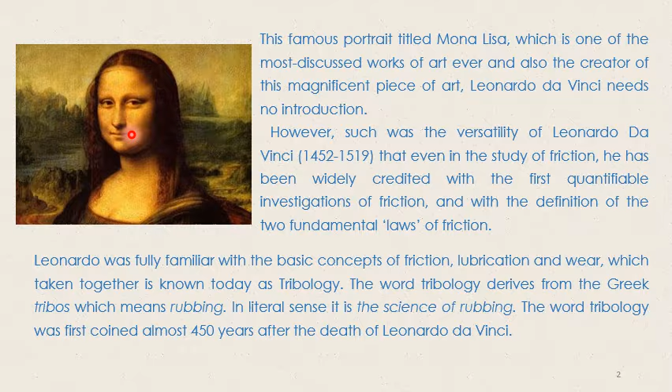Unfortunately, Leonardo never published his findings on friction, and obviously he did not get any credit for his wonderful works. However, he maintained a notebook where he had noted down all his findings with sketches and with meticulous writing. He studied the subject of friction for simple blocks, screw threads, wheels, and many more, which are evident looking at his notebook.

Now, this is one of the sketches which I have got from this particular reference and reproduced over here to show you his meticulousness in drawing the sketch for a friction apparatus. Leonardo's basic laws of friction stated in 1493 were later articulated by Amontons and Coulomb. You must have heard the name of Coulomb because you have done Coulomb's laws of friction in your school days.

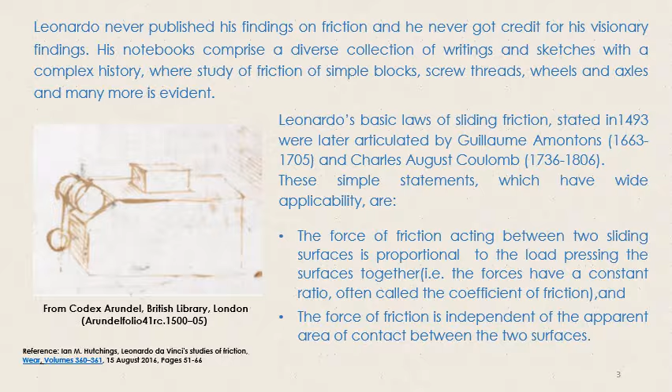Now, whenever one contacting surface has a tendency to slide over another surface, the tangential force generated between the contacting surfaces is known as friction force. And it always opposes the cause which creates a tendency to slide. This is the basic law of friction which you should keep in mind, because it is important while drawing the free body diagram for solving problems, where you should draw the friction forces in such a manner that it always satisfies this simple law of physics. However, there are also certain conditions to be satisfied that we will talk about at a later stage.

In machines and processes such as bearings, power screws, gears, flow of fluid through pipes, etc., we always want to reduce the friction because that will always give you a better system efficiency.

In this context, lubrication is also used to reduce friction between the mating parts of the machines, and the reason is as I have just stated. Whereas in certain situations like brakes, belt drives, car tires, even in shoes used for normal walking, we look for maximization of the friction. This particular part also we will touch upon as an application of friction at a later stage.

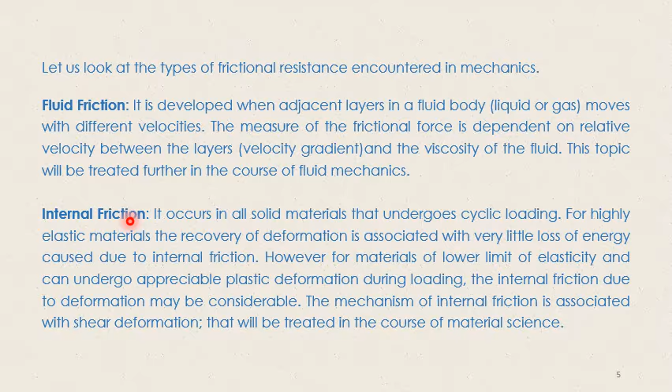Now, let us focus on dry friction. I put this one last because this is the most common type of frictional resistance, and this is the topic we will study in the course of basic mechanics. So we are concentrating now on our subject matter, that is the dry friction.

So as per the basic definition of friction, dry friction arises between two unlubricated solid surfaces in contact having a tendency to slide or sliding. Note the word unlubricated, because in this case there is no lubrication associated with the interface. It is simply a metal to metal contact, and it has got a tendency to slide or sliding.

Now look at this particular figure. It's a very simple figure, a block of mass m placed onto a ground, and a force P is being applied from left to right onto this block. Now what will happen? You very slowly increase the value of P. It is very difficult to do by hand, but anyway, if you try it out, you will find that at a very small force, the body remains as usual.

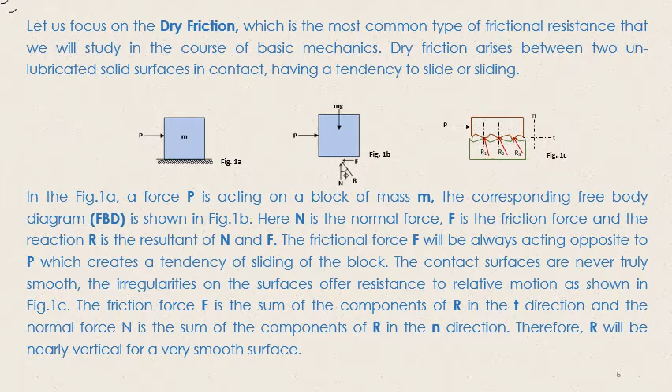Now let's look at the next slide. So I have again copied the earlier figure 1c over here. Now, what I have just told you: in the beginning, the irregularities are in close mesh and offer more resistance to relative motion, because at the very beginning this hump is lying over here, this hump is lying over here, and so on. But as the force P increases, the contact moves closer to the top of the hump. That means this will rise from this place to this place, and relative motion of the block is initiated when it comes up to the contact point.

So this explanation helps us understand why less force is required to maintain motion than is required to initiate the motion of the block. Once it starts, it becomes very smooth. Okay. But just to initiate motion, you require a certain amount of force, which is normally larger than the force required to keep it moving.

Now you can see the second statement of Leonardo da Vinci's laws, as given by Coulomb and Amontons: the friction force is independent of the projected area of contact. That is understood from this particular figure. See, the true area of contact is only the top of the asperities, which is much less than the total projected area. Suppose this is a constant width. Suppose this is the distance I am having, just roughly.

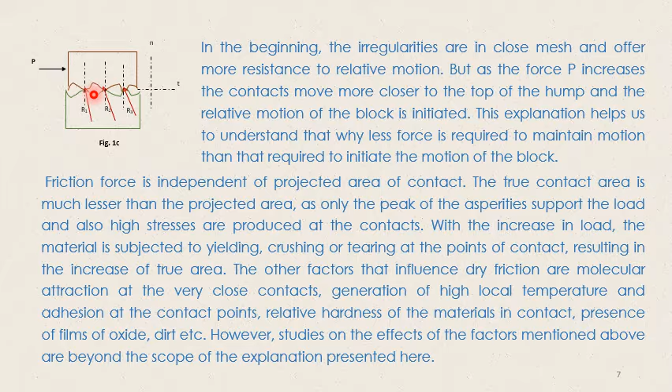So here we can see the standard curve, which you also know. The body was there at this particular point. There was no friction because there was no relative motion. Now you are increasing the value of P, and the friction force, which is of course opposing the direction of P, is increasing gradually. This particular zone OI is called the zone of static friction. And this friction value increases till it reaches I.

Once it reaches I, the motion of the body is just initiated. That particular point is called impending motion or impending slippage. We'll be considering impending motion, and in certain cases we also call the same phenomenon impending slippage. At this point only, at the point I, the magnitude of maximum friction is proportional to the normal reaction and written as F max equals mu s into N. N is the normal reaction, which I have defined earlier, where mu s is the coefficient of static friction.

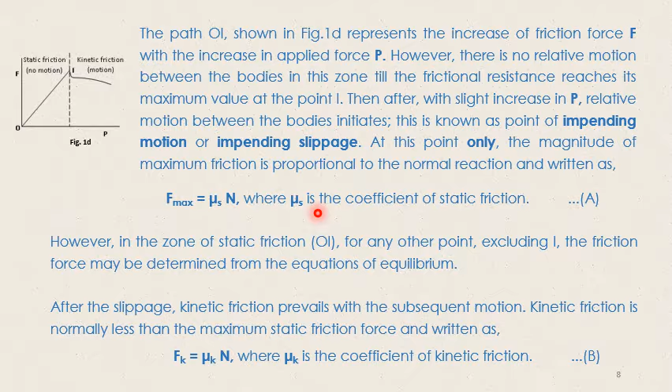So you understand that, just to have the maximum friction force, we always consider the body still in the static equilibrium state, but it is just at the verge of moving to the kinetic friction zone. Okay, so from this slide, what we should keep in mind is that F equals mu into N should be used only at the impending condition and nowhere else. This, again I am telling, is extremely important.

Once again, we refer to figure 1b, which is copied from the earlier slide. Now, what we can write in general is that mu equals F by N. And this F and N are represented in terms of components of R, that is the resultant, as R sine phi by R cos phi, and it gives the value as tan phi. And obviously it is at the impending condition.

Thus, just from the visual look of this angle phi, we can gather some idea about the surface roughness. If phi is very small, then we understand that asperities are not that high, so that will be a relatively smoother surface, and vice versa. So this consideration we take up to represent a visual look, as well as to define that mu also can be written as tan phi, where phi we call the friction angle.

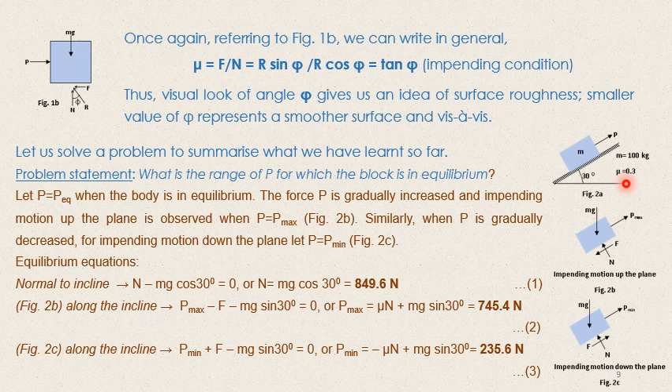So as we discussed in the earlier slide, just note that by considering impending motion, equations 2 and 3 could be solved by substituting F equals mu into N, which we get from the law of friction. The range of P for which the given body is in equilibrium is this much. That result we already calculated in the earlier slide. As far as the problem is concerned, we have the results with us.

But anyway, let us investigate once again. For any other value of P within the equilibrium zone, what happens? Within the equilibrium zone, we can only find out P, F, and N. Again, three unknowns come into the picture. So what we do is substitute various values of P so that correspondingly F and N can be determined. That has been done, and is shown in figure 2D in the form of a chart.

Now, because we are finding F, the force of friction, for the equilibrium condition, we can use either of equations 2 or 3. It doesn't matter. Why? Because in that case, we are keeping F purely as an unknown. So if it comes out with a positive sign, the direction of friction we have chosen is correct. If we see a minus sign, then the direction of friction force should be opposite to what we have drawn in our free body diagram.

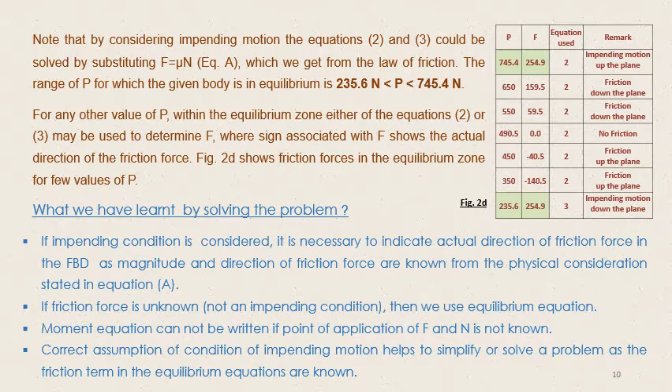Let us take another example problem which states: what is the minimum force P required to create motion of the blocks? This problem refers to figure 3a, where you can see there are two bodies. The first body, having the weight W1, has a dimension of 1 meter by 1 meter. The lower body has a weight W2 and it is placed on the ground. Now a load P is acting exactly at this point, that is, the top left corner.

So to analyze this particular problem, we can understand there are three possibilities. One possibility is that when force P is applied, the top block may topple, number one. Number two, the top block may slide over the lower block. And the last one, the two blocks, that is the top and the bottom block, may slide together over the ground. So let us examine each possibility.

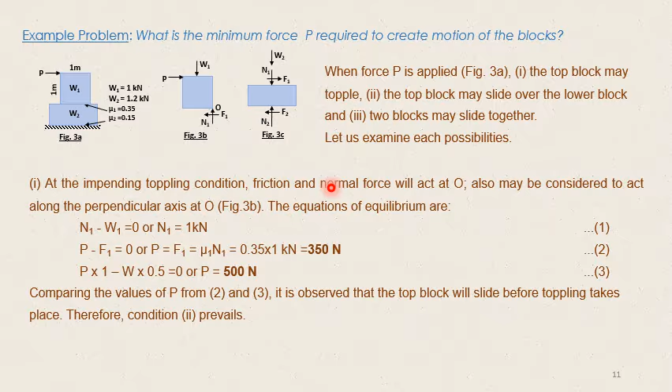So toppling is not considered. That means toppling is not a possibility. Therefore, the top block may slide over the lower block. So let us see the third condition in the next slide.

Now, next we consider the free body of the lower block, which is shown in figure 3c. In this particular free body diagram, we have unknown parameters F1, F2, N2. And we have got two equations: this is the fourth equation, and this is the fifth equation, which we can get from this free body diagram.

Now, we can look into the problem in two ways. One is that we consider F1 to be at impending condition, so F1 can be obtained from the equation of friction, that is F1 equals mu1 into N1. Therefore we can easily solve for two unknowns, namely N2 and F2.

The other way, let us look at the maximum capacity of F1, and then find F2 from the equilibrium equation, and then analyze the value of F2. Let us do that. Because both F1 and F2 cannot be at impending condition simultaneously, F1 is considered at impending condition, so F2 has to be determined from the equilibrium equation. So F2 minus F1 equals 0, or F2 equals 350 Newton.

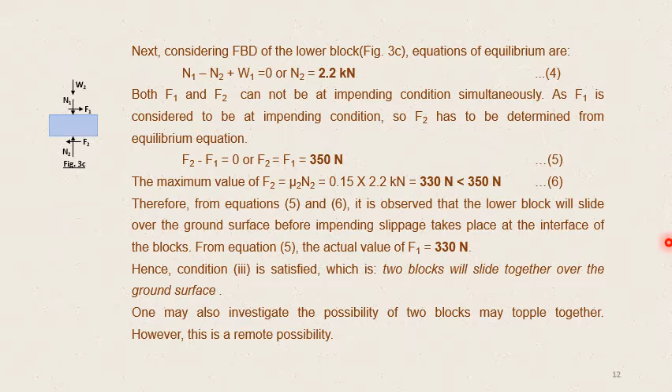Now we consider another situation, slipping and rolling friction. This is primarily applicable to the bodies which are, as I told you, a roller or a wheel sort of thing.

So in this particular case, you can see a roller which is acted upon by a load P acting along the handle, and this load P is transferred to the body of the roller as shown in this exaggerated figure. This black one is the shaft attached to this handle, and it passes through a socket placed at the center point of this roller, so that this shaft transfers the force P onto the roller body in this direction.

So what we see over here is that this P is decomposed into one horizontal force PH and one vertical force PV, and the roller is moving towards right, for which a frictional resistance between the shaft and the roller is put as an anticlockwise moment M0, and also a friction from the ground is acting at this particular point, which is just below the center point of the roller. There is a normal force also acting, and R is the resultant force acting at this point.

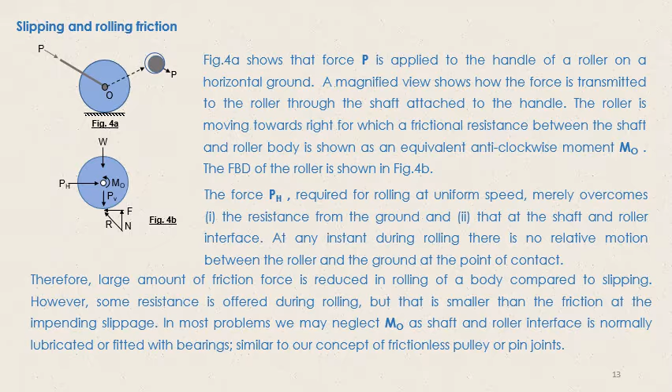In this slide, figure 4B from the earlier slide is shown again, and it is evident from figure B that when M0 equals 0, F and PH do not exist. That is shown in figure 4C. This is very interesting. The moment you remove M0, assume it is not there, then from the equilibrium equation we find that PH must be equal to F.

And if I take moment about this point, F multiplied by the radius equals 0. That means F cannot exist, and then PH cannot exist either. So W plus PV equals N becomes the only equation for this roller, with no other forces in the horizontal direction. This means no resistance to the roller exists from the ground, and the roller will continue to move at uniform speed without stopping, which never happens in practice.

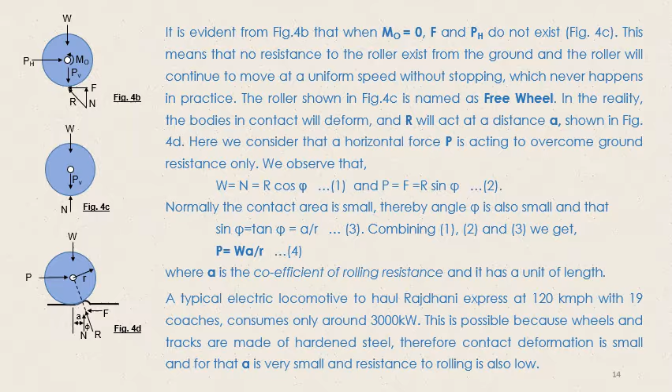Now this is the first problem, what we can see in this figure. So in this particular figure there is a block which is placed between rollers, okay, and this block can only have a vertical movement and it has got a weight W.

This block rests on a wheel or a roller, and it is having a contact at this particular point 1, and 2 is the contact that is having with the ground. Okay, this entire system is having a contact with the ground through the roller at this point 2. Look, for the W1 we are only considering as if the weight of the block is simply transferred to the roller. So we can see a free body diagram of this figure 5a, which comes out to be in this form.

Now what is the problem statement? What is the minimum force P required to roll out the cylinder? Okay, so what should be the value of P so that the cylinder can roll out? Now in this particular case, what could be the possibilities? There are two possibilities: impending slippage at 1 and rolling over the ground at 2.

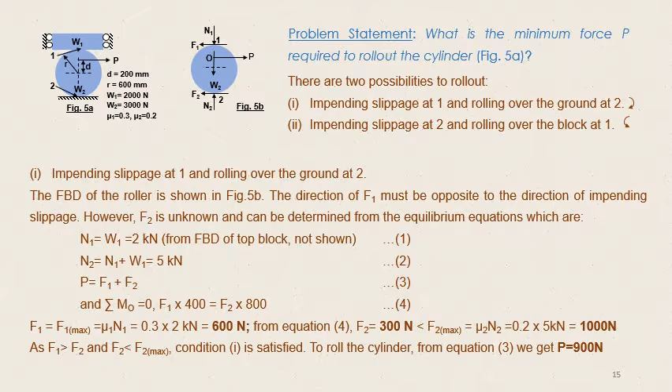Now here, impending slippage at 2 and rolling over the block at 1. So impending slippage at 2 means in the free body diagram, if there is an impending slippage in this direction, F2 must be in this particular direction. So the direction we have drawn earlier, or what has been shown in this particular free body diagram, is absolutely okay. And as usual, in this particular case, F1 will be determined from the equilibrium equation, because we do not know anything of F1. It is purely unknown, but F2 is known from the impending condition.

So F2 max is 1000 that we earlier observed. Okay, and from equation 4, that is on the earlier slide, we get F1 equals 2000 Newton. So here F1, what we are getting from the equilibrium equation, is much more than F1 max. F1 max means this is the maximum possible friction force point 1 can hold. Beyond that, the point will slip. And we have already considered a slippage condition at point 2.

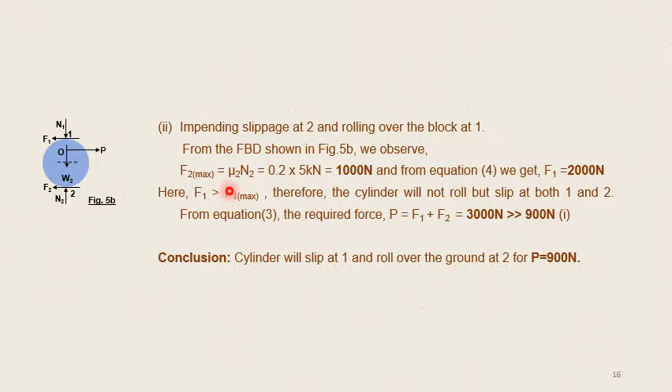Now we take up another problem where you can see there is a load, and this load is nothing but a heavy beam having a weight W, and it is resting on a series of rollers. I don't just say 4 rollers, it is a series of rollers over which the beam is placed, and we want to push the beam with a force P. So the problem statement is: determine the horizontal force P needed to push the beam at a constant speed over a series of massless rollers. The coefficient of rolling resistance at the contact surfaces for all the rollers taken together is shown in figure 6.

See, what is meant by that? Each individual has got a coefficient of rolling resistance, and all together it is 0.2 mm. Similar is the situation at the ground level. This is at the beam to roller contact, and this is the roller to ground contact. And the radius of each wheel is 15 mm.

Now, first we draw the free body diagram of the iron beam, and in this particular free body diagram, we are considering one case: that Ws is only the weight shared by a single roller, and similarly Ps is the force required to overcome the resistance offered to rolling for a single roller only. Okay, so that's the reason we have given the value as Ps.

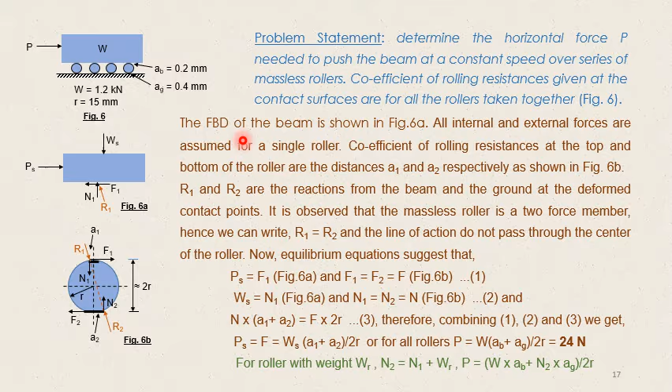So here we considered two examples for slipping and rolling resistance problems, and I hope that you are clear about how to consider problems involving slipping and rolling. So we complete part one of this lecture on friction with this slide.